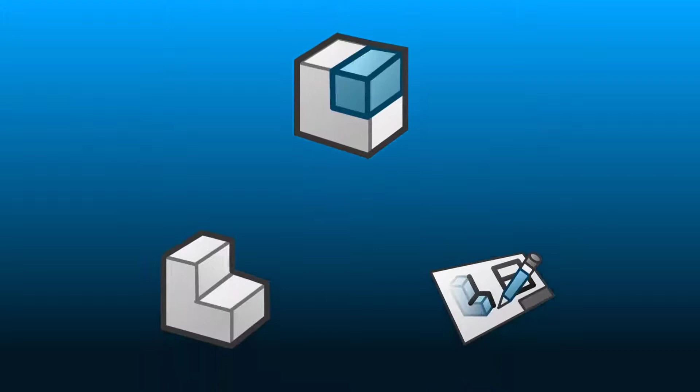Whether you work in a large organization or just a small team, no doubt you're concerned with storing, managing, and collaborating on your design data. And it's tricky, because SOLIDWORKS parts, assemblies, drawings, and other supporting documents, they're all linked. Consumer cloud storage apps don't know how to handle that. Maybe the investment in SOLIDWORKS PDM and Manage isn't right for you.

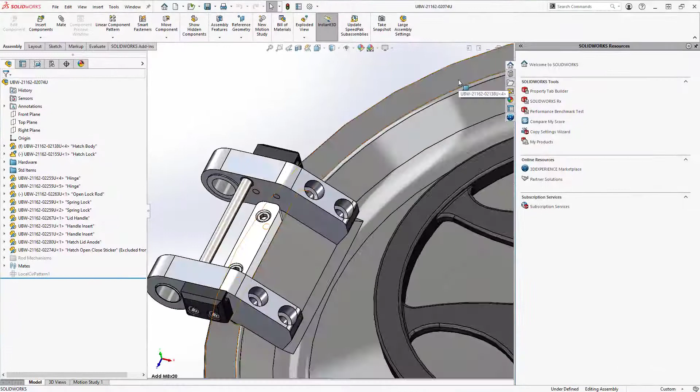There is another way. When you connect SOLIDWORKS to the 3DEXPERIENCE platform, cloud data management is just a few clicks away. Eric Engineer and Debbie Designer are part of the team working on the Nemo submersible. They are on a tight deadline to finish up the hatch design. Eric puts the finishing touches on the latch mount by inserting fasteners from SOLIDWORKS Toolbox. A quick check on the assembly drawing, and everything is up to date and ready to save to the cloud.

First, he logs into the 3DEXPERIENCE platform. It's his team's secure connection to the cloud. Right from the task pane, he sees the status of his work. These indicators show which components need to be saved. As for the hardware and other standard parts, SOLIDWORKS is configured to automatically catalog and release these items so all users can access their shared libraries online.

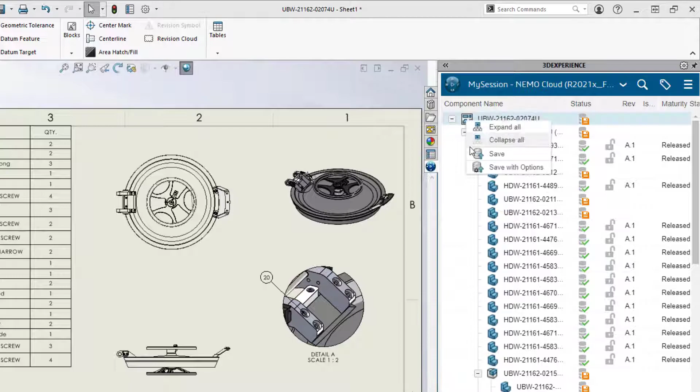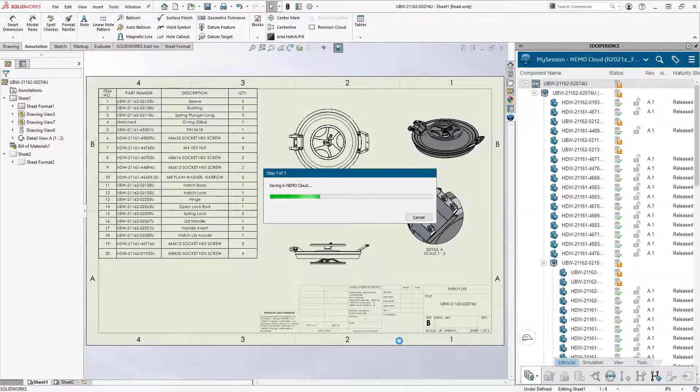The Save dialog shows exactly which items require an update. He can also assign any item to a bookmark, such as related drawing files. Out of a long list of components like this, bookmarks are a convenient way to flag them for easy access. Only the new or changed items need to be uploaded to the cloud. This makes efficient use of network bandwidth, but still ensures everything is up to date.

As the leader of his team, Eric is able to release his own designs. Easy-to-use lifecycle operations like this help the team avoid accidental overwrites. Switching over to his Bookmarks tab, he sets the related part and assembly drawings to Released. It's just 2 drawings for now, but as the detailing work continues, the bookmark will keep everything organized for quick access.

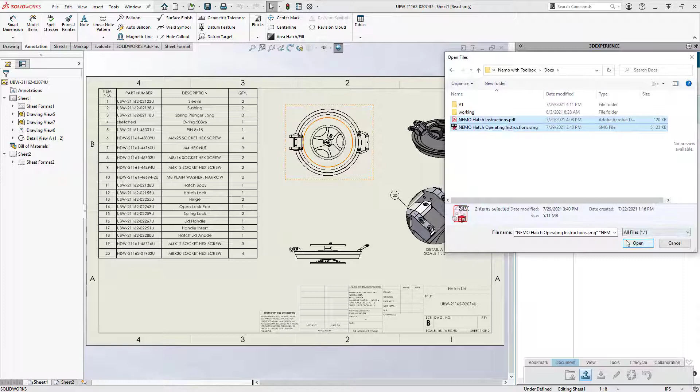That includes any other supporting documents, like this PDF instruction sheet and the related SOLIDWORKS Composer file. Most document types can be previewed interactively within the SOLIDWORKS task pane. No need to launch external viewing apps. Eric has a backlog of finished designs that also need uploaded to the cloud. He can automate this with a batch save. He just selects his local design folders and assigns them to the appropriate cloud space. SOLIDWORKS takes care of the rest.

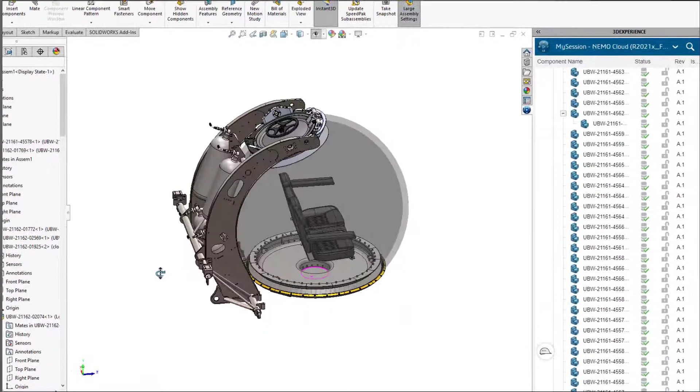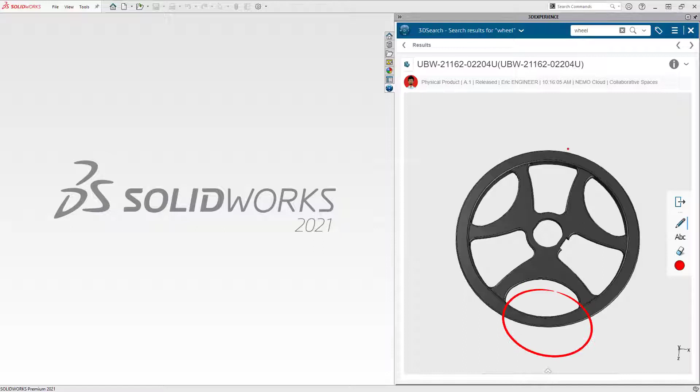As the Nemo sub design evolves, the team must respond to change orders quickly. Debbie logs into her session and sees a message from Eric requesting a change. A quick keyword search shows several results. This one looks right. Debbie uses the 3D Annotation Tools to quickly sketch out a couple ideas. From here, she opens the part in SOLIDWORKS. The latest version is automatically retrieved from the cloud.

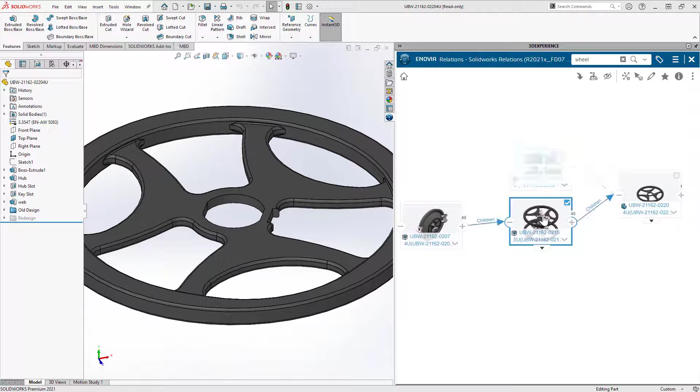Before she makes any changes, it's best to do a where used search. The hand wheel is used in one subassembly below the master hatch assembly. She can open that right into her modeling session and get to work. This version of the subassembly is released. In order to make changes, Debbie needs to create a revision of the assembly and the hand wheel.

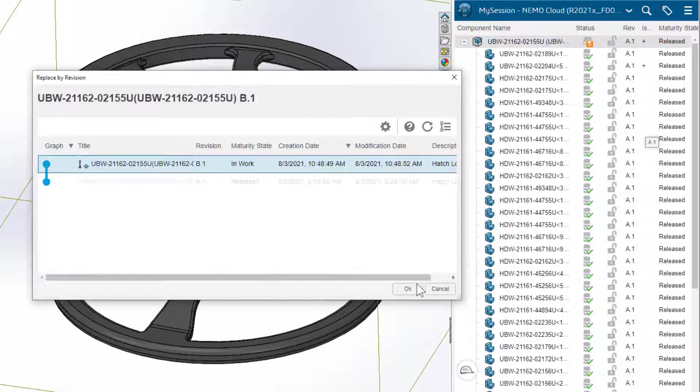The status indicators immediately show that the current assembly structure is out of date. So she replaces it with the new revisions and sets them to reserved. This gives her write access to the items she needs to modify without locking other users out of the rest of the assembly. The redesigned hand wheel looks great, but she needs to update the drawing. The shared bookmarks give Debbie quick access to the related drawing files.

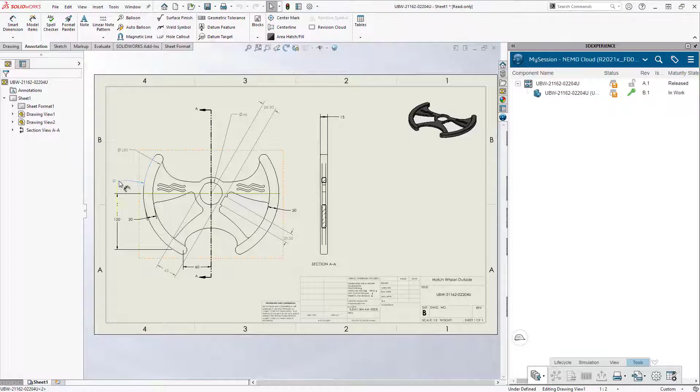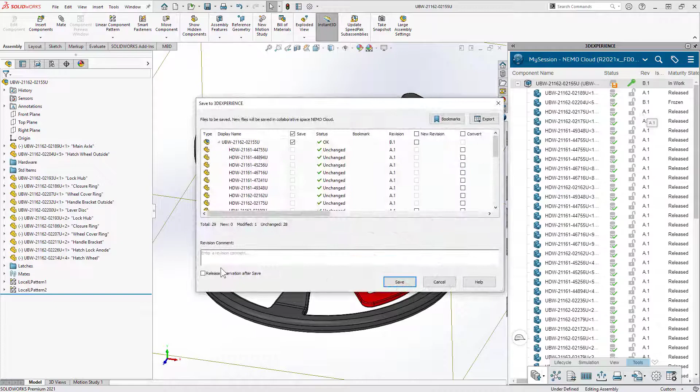The drawing is now in sync with the part model, so she saves it to Revision B, then sets the part and drawing to a frozen state so they can be reviewed. Returning to the assembly, she finishes out the design by adding the latch mechanisms and saves the new revision back to the cloud.

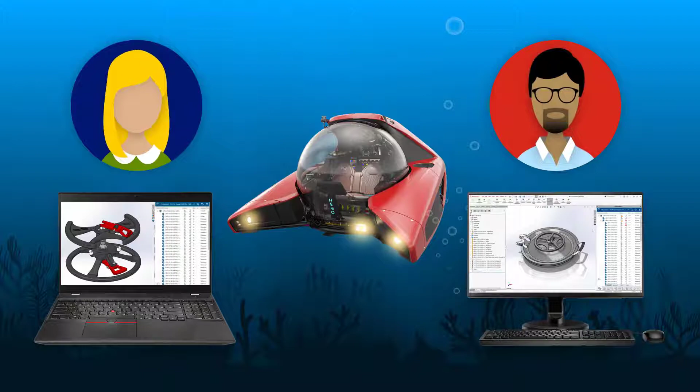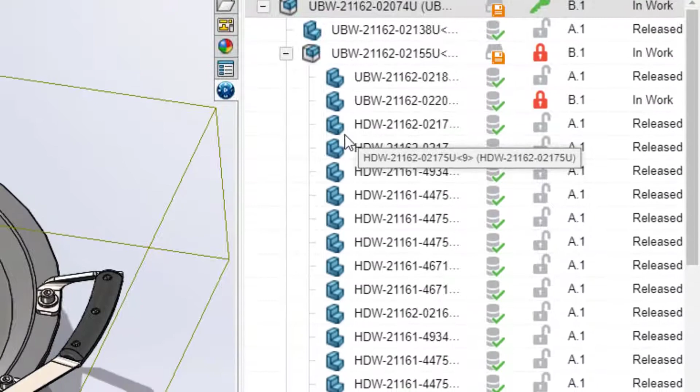In order to meet their tight deadline, the Nemo team often needs to work on the same design files at the same time. Eric is working on a new revision of the master hatch assembly. These icons let him know Debbie has the handwheel assembly reserved and is currently making changes. He can reserve the top-level assembly without affecting Debbie's work on the subassembly. This modular approach to access control allows users to design concurrently without accidentally saving over each other's progress.

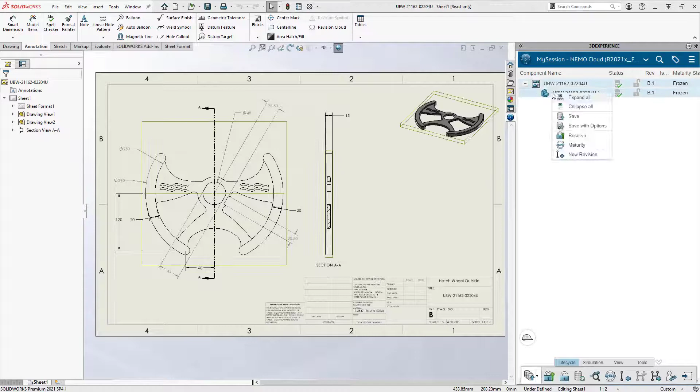A short time later, Eric sees that Debbie has finished up. He just needs to reload the latest version of the subassembly from the server. Taking a look at the handwheel drawing, he likes her redesign and moves it to released. Back in the assembly, Eric attaches the connecting rod mechanisms, then returns to his bookmarks to update the drawing. Bumping the assembly and drawing to revision B, he's ready to save.

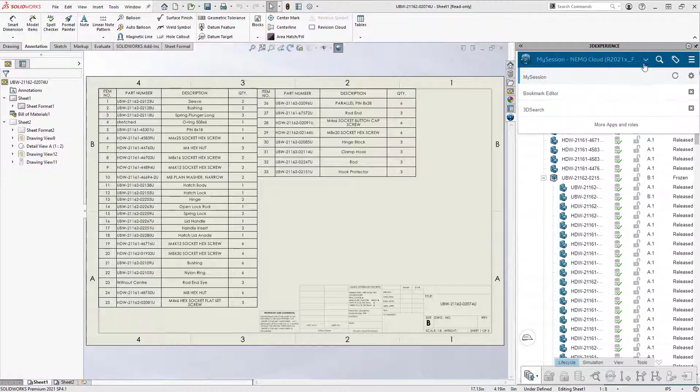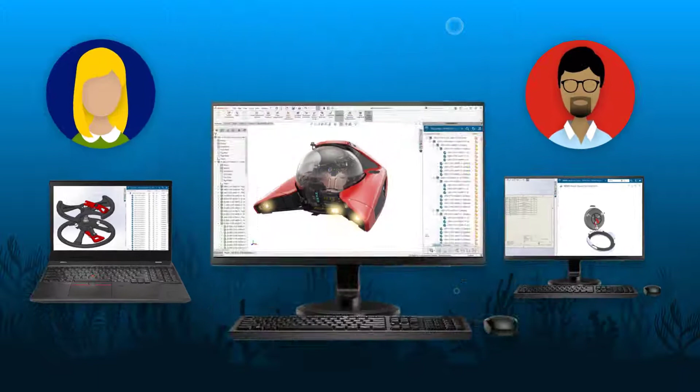The revised hatch assembly requires new versions of the supporting documents. From the convenience of his Bookmarks tab, Eric uploads the latest version of the Composer file and uses the interactive preview to inspect the latest revision. Out-of-the-box cloud data management enabled the Nemo team to be productive right away. They were able to safely store their data, manage changes, and design concurrently, all without ever leaving their familiar SOLIDWORKS design environment. Everyone in the organization benefits when you connect SOLIDWORKS to the 3DEXPERIENCE platform.